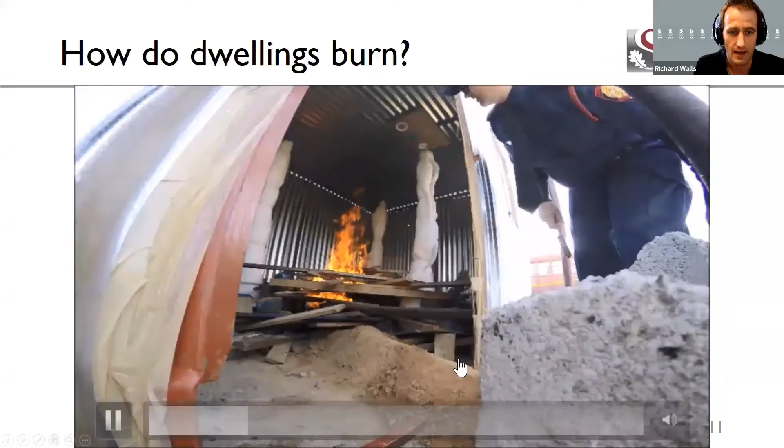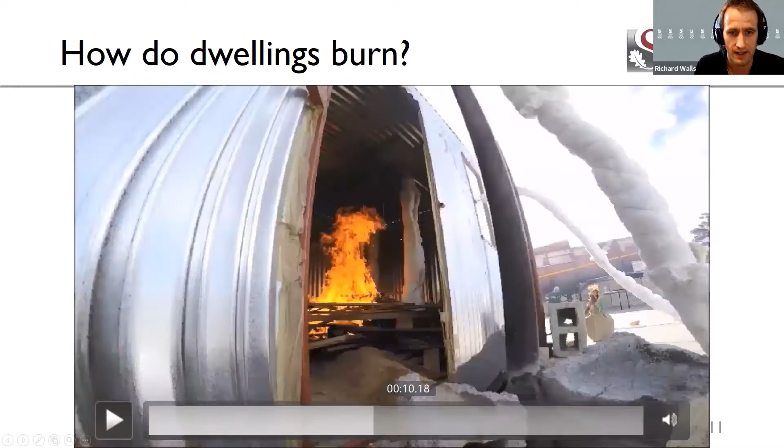So let's look at how dwellings burn. What's quite fun talking to firefighters is we started with conducting experiments just on single dwellings. What's useful, but maybe not unexpected, is that you see fairly typical fire dynamic behavior: there's ignition, a growth phase, a localized fire, a hot layer builds up at the roof, and then you head to flashover in the dwelling. From flashover, you get 1,000 degrees Celsius, flames emerging from the windows, and so on. We can describe this relatively well, and with computers and mathematics we can now predict the temperatures and fire behavior with reasonable certainty, if we know what's happening inside. Ignition is far more difficult.

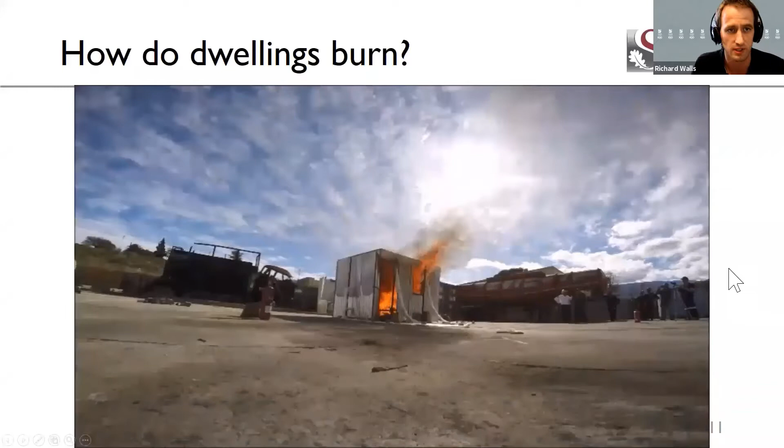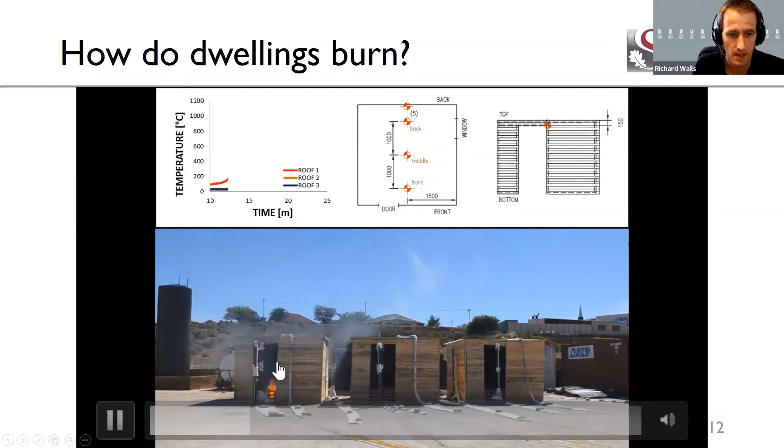So we started thinking about what happens when there are multiple dwellings with different types of cladding. Here are 3 timber dwellings, and at the top you'll see the temperature. In the first one, we ignited some timber cribs, and the temperature at the roof is now about 100 degrees Celsius, slowly starting to build up. Once there's enough hot gases, the cladding on the wall ignites, and we have flashover in the dwelling.

It then rapidly spreads through to the dwelling next door. We actually had a fire tornado, a little fire whirlwind developing, 2 to 3 meters in diameter. It spread to the second dwelling, the hot layer drops, the second dwelling ignites, and it spreads to the third which also ignites. Once it gets into the cladding and finds the combustible lining, that's always when things start going wrong. Even though it was timber, there was a bit of a delay, but once it got to the cladding, it was gone. We got temperatures between 1,000 and 1,200 degrees Celsius in this experiment - very intense, very rapid spread, very high heat release rates. Eventually it just burnt out completely, burning as fast as it could. At 16 meters away, items were starting to smoke from the incredible radiation.

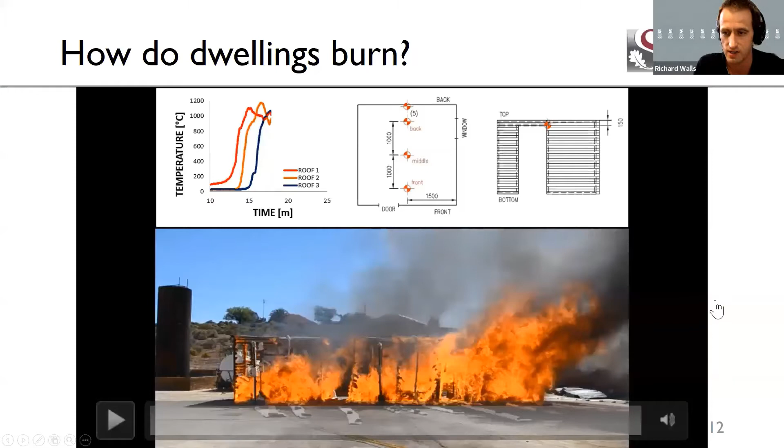It's much lower intensity when you have non-combustible cladding. If you have steel cladding or corrugated iron, it's a far less intense fire. We can start predicting that, predicting flashover and spread. This is actually a computational fluid dynamics model looking at spread from one dwelling to the next, predicting when each would ignite and how it would behave.

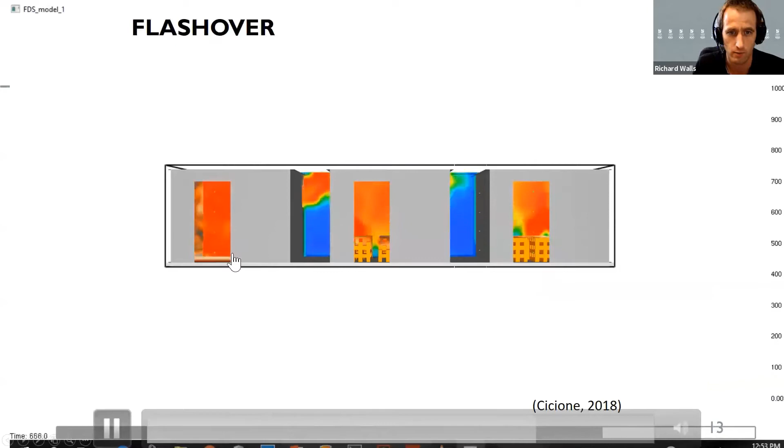On their own, these models are not particularly useful - it's like, well, great, you have a very accurate model of something that's highly uncertain. But at least what's useful is it can start helping us predict spread. I won't show it in this presentation, but models for predicting spread through an entire settlement are starting to be developed. So from there, we actually moved on to 20 dwellings.

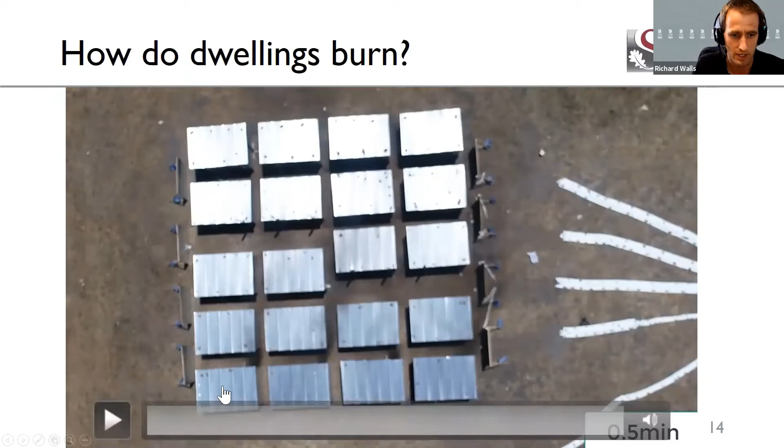This is a full-scale experiment with 20 dwellings, arranged 4 by 5. We ignite the 4 dwellings at the bottom, and about a minute after ignition, the first 4 have caught at the bottom of the screen, then it spreads onto the second line of dwellings at about 2 minutes, and from there spreads to the third line. By the end of the experiment, about 5 minutes, all 20 homes were on fire.

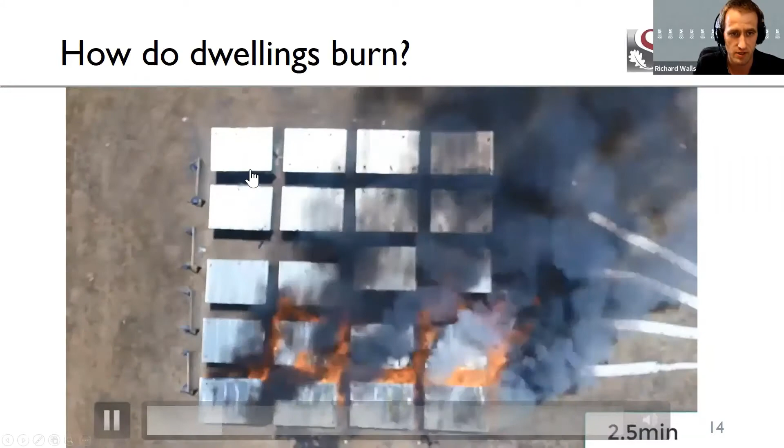There was a bit of wind blowing, about 20 to 25 kilometers an hour, but there are far stronger winds that blow in our area. The fire spread and came straight through, hitting that last line of dwellings. The normal response time is way in excess of this - so if a fire starts this way, by the time it's this far along, maybe the fire department is just on its way, if someone's dialed the right number.

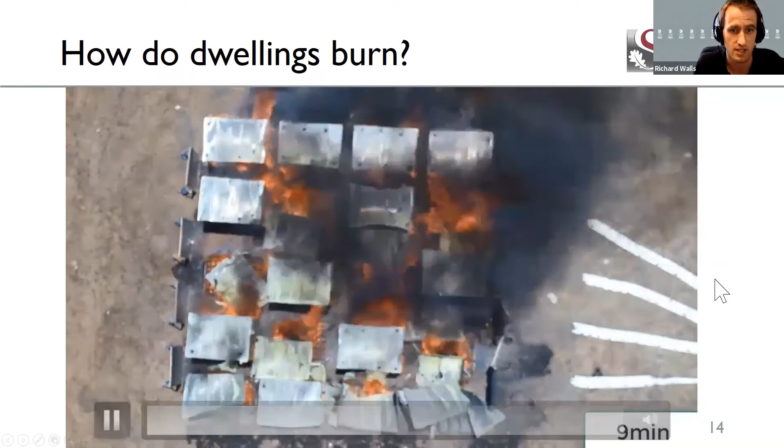It was just useful to show the intensity and to evaluate interventions against this, because many people in South Africa are proposing all sorts of suppression products, paints and boards, trying to sell them to government, municipalities or fire departments to solve the problem. They think it's magically going to take it away. But not a lot of testing has been done to evaluate informal settlement solutions against real life experiments.

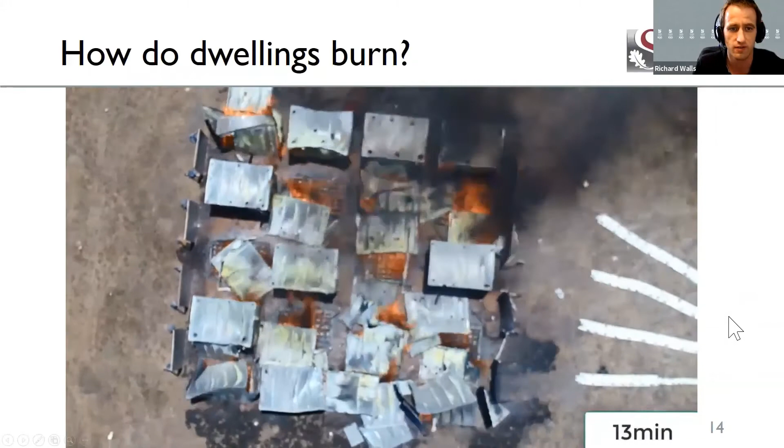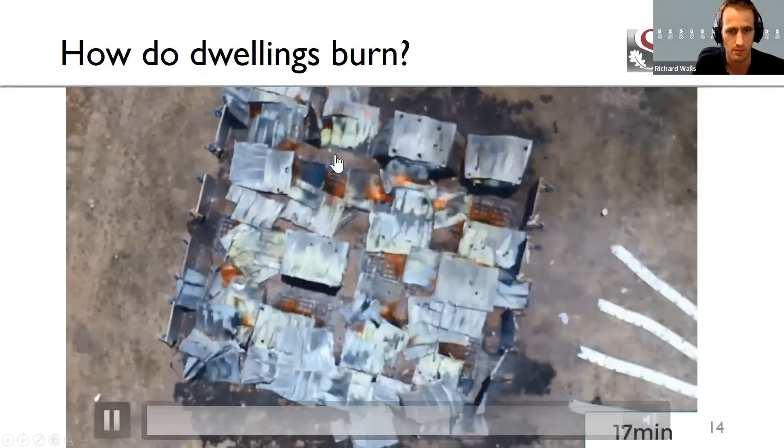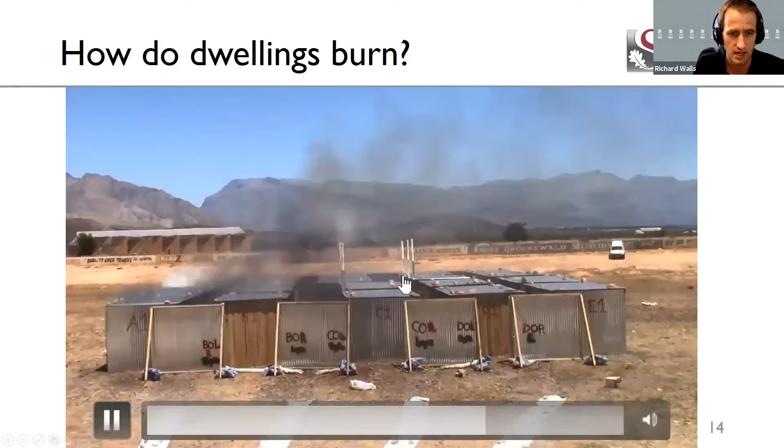So that's what we've been doing, to try quantify what we actually need to do to slow these things down or stop them. Coming back to the video, after about 17 minutes there was pretty much nothing left - the entire settlement was totally gutted. What was actually kind of funny is the last dwelling standing had 4 dwellings around it with timber on the side, and it burned so ferociously that it didn't allow oxygen into the one in the middle, so we actually oxygen starved that one. Here you can see a side view coming all the way through.

There's us watching - months and months of work, and 5 minutes later our experiment was long gone. This is actually on YouTube. I forgot to put the link up, but this is public knowledge, and it's in a journal publication that's in the public domain as well. So all this data is publicly available.

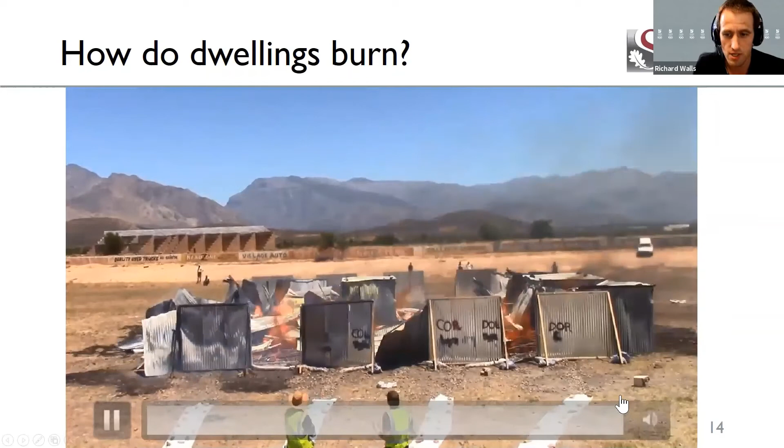You'll just see a front view pop up now where we then ignited the first lines of dwellings. What's important to see is the ignitions that occur, because many people will often try to protect the walls. But what you actually find is with the intensity, if there's any hole anywhere, the fire will slip through.

Coming along, just going to quickly run through another case study from which we're trying to start basing data on fire spread and behavior. This is the Imizamo Yethu fire in 2017: 2,197 structures destroyed, 4 fatalities, around 10,000 homeless, extensive damage to the local infrastructure, about 100 million rands worth of damage.

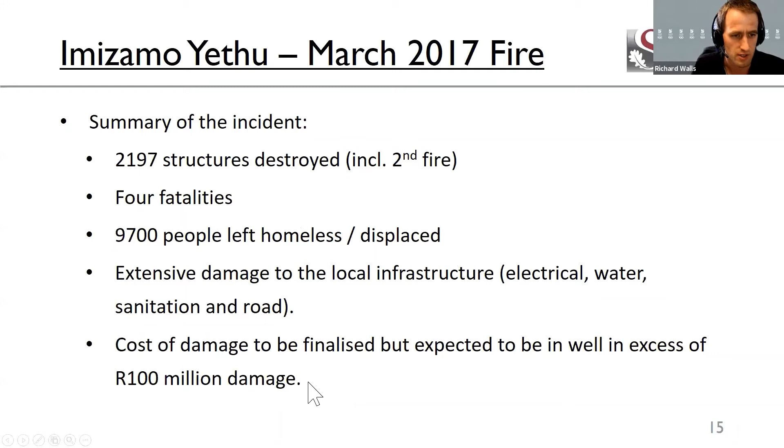It's about $8 million - I think it's less, our currency's gone down a lot, so $7 or $6 million worth of damage. It was a lot of damage caused to the area: 176 firefighters, 2 helicopters, 13.5 hours fighting, and 19 acres burnt.

This also is in a journal paper, so this is also publicly available knowledge. If in doubt, you can email me and we can send it through, or contact Nancy and we can pass these papers on to you. So the fire started there.

Because there was a lot of firefighting effort, it was slowed, speeded up, slowed, speeded up. But what happens is it hit a line of blue gums, and then everything just went pear-shaped after that. So the first sort of 7.5 or 8.5 hours, there was about 1 home a minute being lost. But then it hit a line of eucalyptus or blue gum and then blew down the hill.

Then you're about 9 homes a minute being lost after that, for a period of roughly 2 hours. Then it started slowing down as the firefighting operation started to take effect. They even had helicopters bombing homes, which is not normal. Eventually at about 1 o'clock they managed to stop the fire. So it was an incredibly intense fire and a lot of damage done.

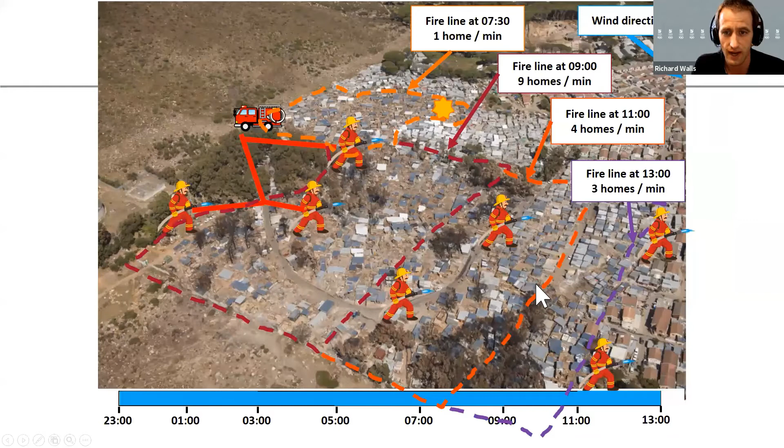So I'm just going to lastly swap to something - I'm going to use it very briefly just to show what happens in a real life incident. Oh sorry, this is now footage - unfortunately this I can't share with you, but I have got this in a private file.

So this is actually another analysis that is the paper we can share. There is a paper on this - I can't share the video, but I can share the paper. This is where about 40 homes got destroyed.

What's interesting to see is the initial community response, putting in firefighting efforts early on. But it also, as you probably have seen, is that there was actually a gas canister detonation in the middle of it. It hit probably an LPG canister.

It was about a little bit further on, and it ended up spreading rapidly. In this period of time, 41 homes got destroyed. And what's useful is we got data from start to finish: what did people do, how did they respond, where did they go, how did they intervene, how did they evacuate, et cetera. From that, it's useful to then evaluate strategies.

Again, there we go, you'll see a canister detonation. Shortly before that, there were people on roofs fighting the fire. After the detonation, you can see everyone basically runs away. But there was still a lot of people in the area.

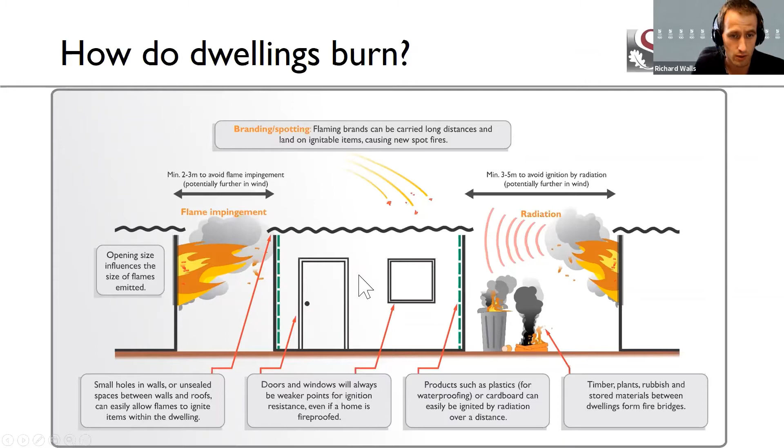People will also try to retrofit the homes and make them more fire resistant. But at the end of the day, the door and the window is always your weak spot. If you've got flame impingement against the window, it will crack, the curtains will ignite, and you've got a path into the home. So even just closing your doors and windows upon evacuation helps - time is of the essence.

One major problem we have in South Africa is people, firstly, don't understand how complex it is getting to these events, and secondly, who to phone. We have a bit of a problem in that often they phone the wrong number - they'll phone the police rather than the fire department. That hopefully will be addressed soon.

So the more we can cut down this timeline, the better. Anything that reduces the time required helps. But this is especially difficult when you need police escorts, and often we have live electrical connections that also need to be turned off.

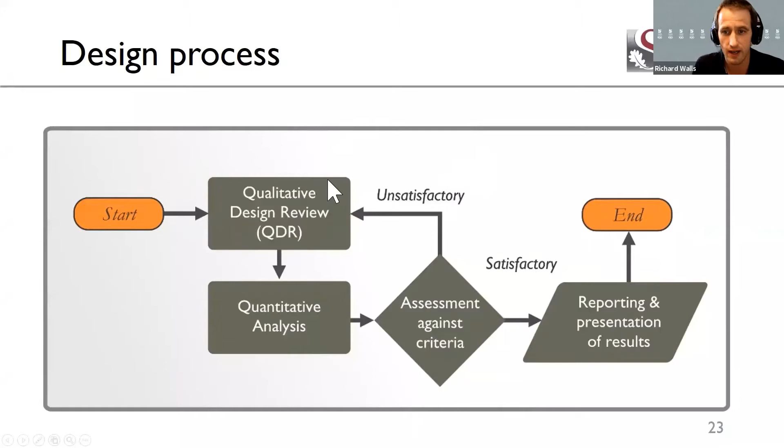So in this, flowcharts have been produced to help guide people through, especially municipalities and decision makers, to analyze the context, review the settlement layout, establish fire safety objectives, identify hazards, establish fire scenarios and acceptance criteria, then trial fire and social scenarios, and run through this. We don't have time to look at all those things, but there are ways and means of putting together a picture of what is my community, what do I need to do, what is success, what is failure, and then how do I compare it against that?

And also, where the experiments that I showed you earlier is trial fire and social scenarios. A lot of the solutions we see trialed in South Africa are less effective because they don't understand fire dynamics, ignition, spread, and all the intensities involved. I'll show you some of those.

Ultimately, we propose a bit of a framework in that there is no magic solution. Unfortunately, I spend a lot of time presenting to the Department of Human Settlements and various other groups, and you'll arrive there and they expect you to have this magic wand to give them a gadget that can take the problem away, and it doesn't exist. As I said, this is preaching to the converted here.

We need a range of things. You may have different names or classifications for these, that's fine, but it's just the concept. We need active fire protection: suppression, detection, etc. That's you guys doing a fantastic job. Passive fire protection: construction products, area layout, how do we reduce the speed of spread? And then how do we do fire prevention, reducing risk of ignition, which I know many of you are also involved in.

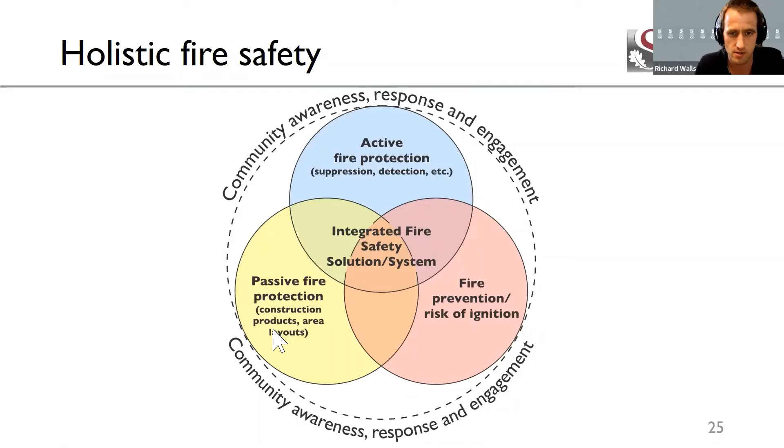I think the problem we see in South Africa is often a municipality will target one area. They will put money into buying more fire trucks, which is great, but if we're not doing fire prevention, that's a problem. Or they will buy some passive protection product to put on people's walls or try to improve home construction, but to be honest, those are often less effective, or there are just too many fires starting and not enough fire response.

So in the work, what we do is map out a lot of different interventions. These are just some of them: reblocking, boards, paints, improved construction materials, access, electrification, first aid, community response, water, fire department, buckets, extinguishers, and then just look at what's the pros and what's the cons.

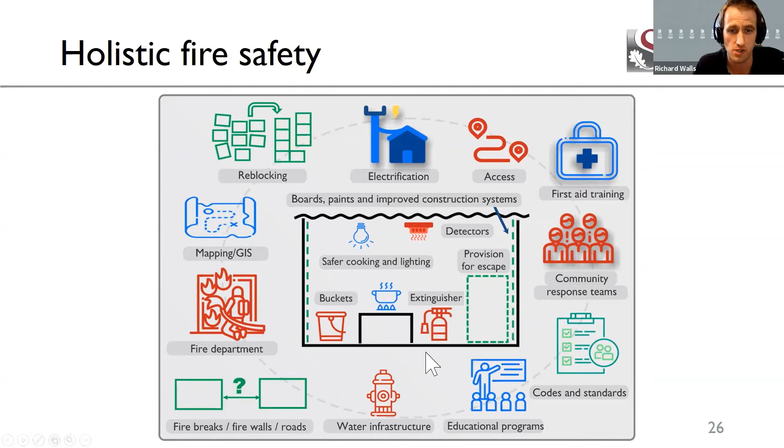As I said, no magic solutions, but just looking at, if I issue a fire extinguisher, great, one 9-kilogram DCP may do the job, you might need a second one, but does it need maintenance? Do you know where it is? What's the cost of it? All those sorts of things. So we just take it through. That's why the book's so long, because it takes you through a lot of interventions and evaluates them.

So here are some of the things we evaluate. For instance, fire departments, including strategies, training, mobile firefighting units, aerial support, improving relations, etc. Looking at a national unified emergency number, that's big for South Africa, it may be less of a deal where you are. Water hydrant infrastructure, suppression products, and then you get blankets, bucket brigades, dry firefighting.

Then we have smoke and fire alarms, community response teams, reblocking, firewalls, roads, construction materials, retrofitting of homes, escape mapping, electrification, fire safety, improved cooking, education, and medical training.

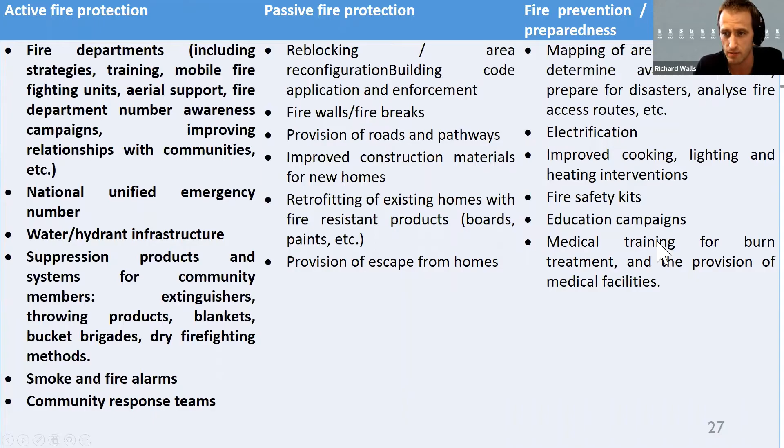So those are some of them. Just to summarize, let me briefly go through some of these items.

Firstly, our main problem is knowing the phone number, knowing the local fire department number. People regularly phone the police instead, and that's probably the biggest issue. If we could get that right, people would just phone the fire department. The problem is it's a 10-digit number, Cape Town 021 480 7700 - it's too long. Hopefully that'll be addressed soon. The City of Cape Town is doing a great job, and Winelands and various others, to promote it, but it's still difficult.

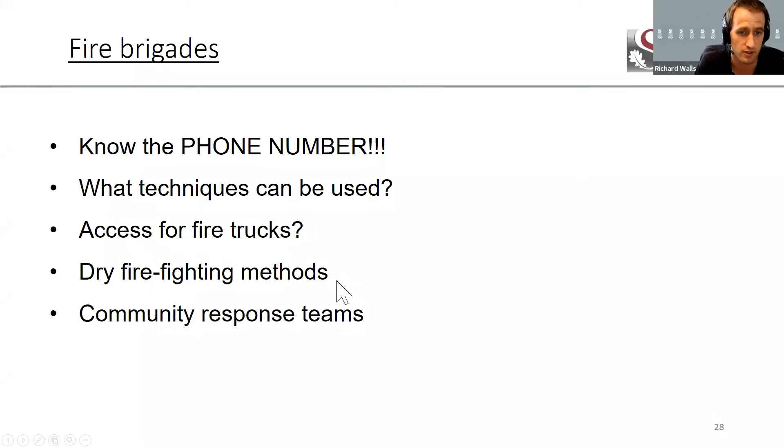What techniques can be used? Access for fire trucks - these are the sort of questions that can be asked. Can you use dry firefighting methods? We used to do that back in the day, but it's a bit dangerous now, driving trucks over things - you can squash people. So, community response teams.

I think many of you are aware of those, so I'll discuss some of the interventions currently being tried, and where they work and don't work.

A while back there was work on intumescent paints. Intumescent paint is a fire retardant paint you put on a home, and it basically expands and provides a char layer. It's commonly used in structural fire design for high-rise buildings, tunnels, and all sorts of places. As a product it's often quite efficient, but for informal settlements it just doesn't work, because this is meant to protect structural elements, not to prevent ignition.

If you put this on, it doesn't necessarily mean you're going to have reduced ignition, because the impinging flames will still fire the home. Even if the paint activates, chances are it's not going to do much. Same thing with boardings - people put on boards and they don't fire stop it.

Fire safety kits are often issued after disasters. So when homes are burnt down, they will issue sheeting and timber, etc. With recent budget cuts, that stopped happening. This at least helped with relief efforts and helped put people back on their feet, but it didn't reduce the fire risk - the fire risk remained identical.

Various educational programs, which I'm not going to have time to go into, but also looking at municipal infrastructure, and how this influences and doesn't influence things.

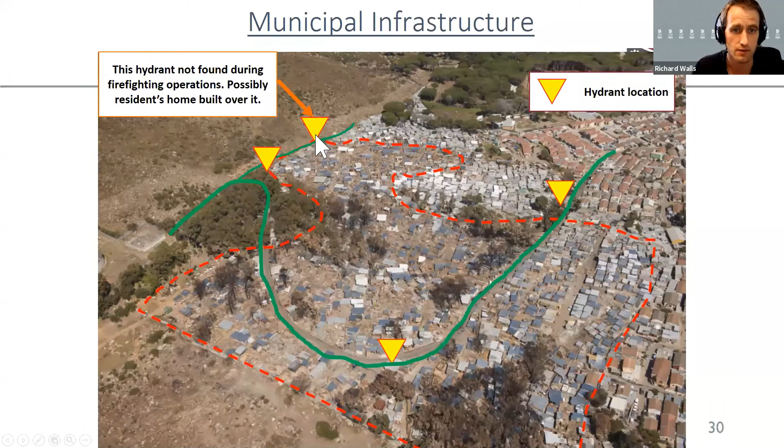For instance, this was the Imizamo Yethu disaster. These were hydrant positions, but one of these hydrants was not found during firefighter operations - possibly the resident's home was built over it, so they may have been using it for domestic water supply. Then this hydrant here was used extensively; they had three lines going off of it, but it had insufficient pressure for the multiple lines, so they had to keep swapping between the three different lines. You didn't have three teams operating, only one at a time, because of water restrictions in the area.

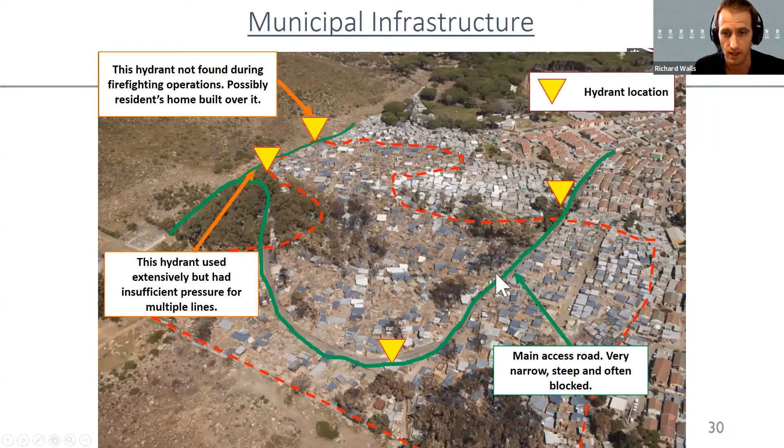The main access road was very congested, and often these infrastructure problems - which I understand many of you may not have the authority to deal with - make a big difference. The road was narrow, with limited access, and people build into the roadway, so it's just a general mess trying to get people in and out of this area during a disaster. So lobbying for decent infrastructure and road access makes a big difference.

Electrification - now electrification does help. We are seeing numbers that show when suburbs are electrified, it is assisting, but I think sometimes people think it's a magic quick fix, that once homes are electrified all the problem goes away. You see everywhere in the world, including America, electrified homes and you still have homes burning down. One of the problems we have is illegal connections.

People will tie into existing infrastructure - you can see all these lower lines are electrical connections, and this becomes a mess. Fire departments can get electrocuted by it, or when the fire truck arrives they actually just can't get their truck underneath, so they have to either break the lines, which is risky, or do various things. It's a major problem - they often just can't get in because of these electrification lines.

I do support electrification in general. It is good, and it helps reduce risk and improves quality of life. But I think often decision makers aren't aware of the problems, and we are seeing quite a lot of electrical overloading. A line comes into people, and we often have electrical problems leading to other issues.

Cooking, lighting, heating - the main question is, what could we do to improve the way people use energy for daily living? There are various things: safer cooking stoves, solar lights, all sorts of different interventions that people are doing for cooking, lighting, and heating. All of them have their place, and I would encourage all of them normally.

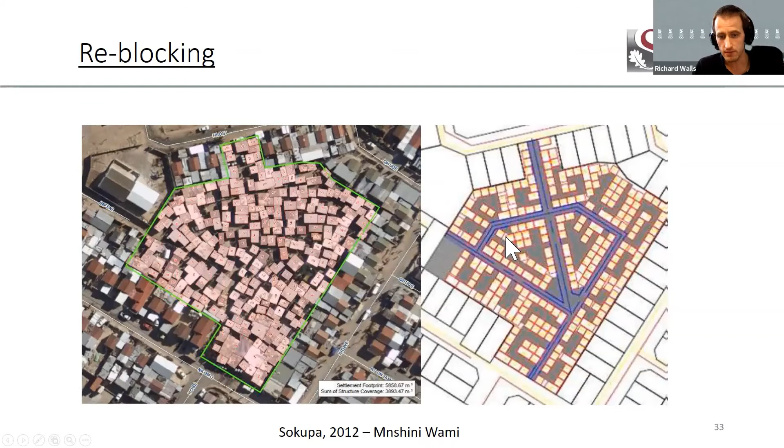There has been a certain amount of success with reblocking in South Africa. For instance, you have a settlement, here's an informal area, and the people work with an NGO or municipality, and they reorder themselves into a blocked arrangement. This is good for providing access, layouts, a bit more flow, etc. It's quite time consuming, quite resource consuming, and it needs a lot of community buy-in. This does not happen overnight - it requires the roads people, the infrastructure people, and all sorts of people sitting around the table agreeing, plus community investment. A lot of people are pushing this, and I'm not against it, but I think people don't realize how much work it is. This is becoming more of a policy in South Africa, but it's not easy, and it is slow.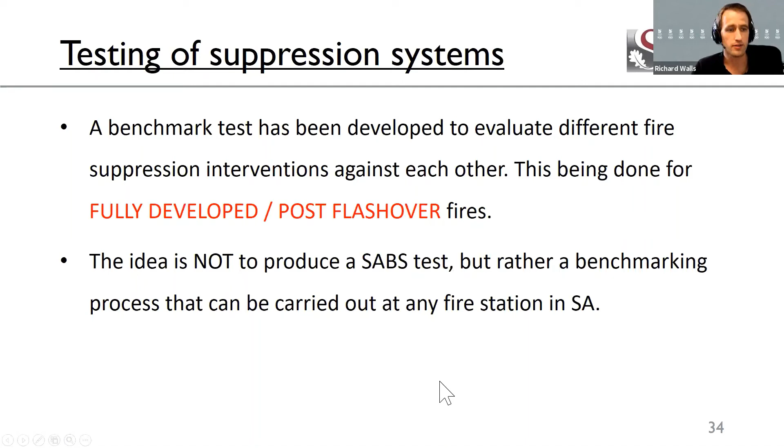Fire suppression systems may also be interesting, at least in terms of evaluating things. We developed a benchmark test to evaluate different fire suppression interventions against each other, done for fully developed post-flashover fires. The idea is not to produce an SABS, NFPA, BS, or whatever code of standard you have, but rather a benchmarking process carried out at a fire station in South Africa or abroad.

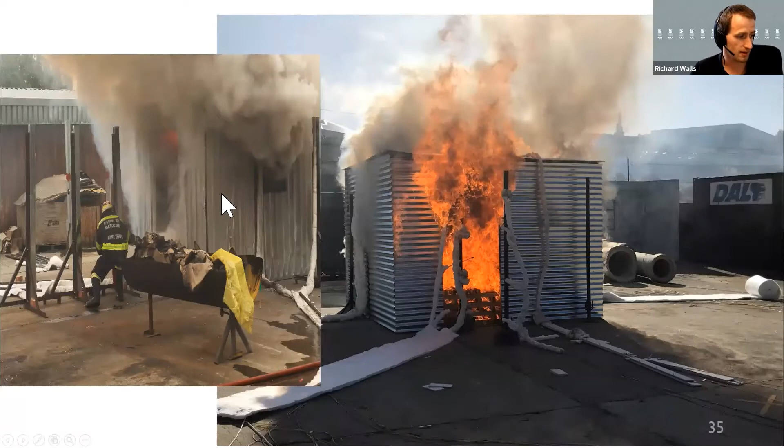So we basically just built a dwelling with a certain fuel load and then burnt it down. As I said, I like arson - I burn things down. And then we asked, how can we put it out? We put it out in various different ways.

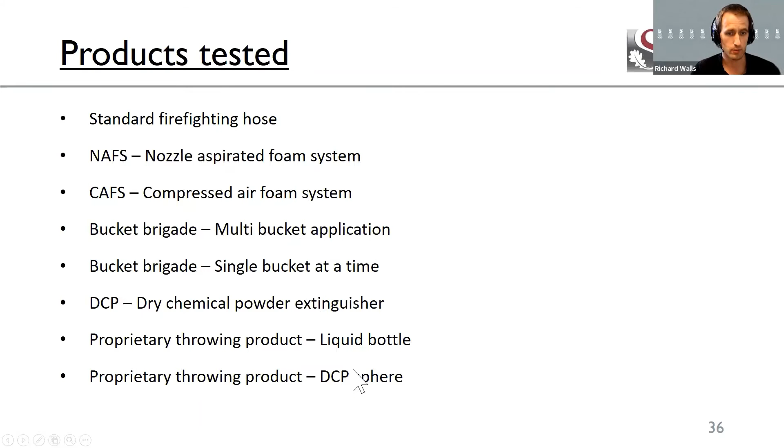Standard firefighting hose, nozzle aspirated foam system, compressed air foam system - those top three are the fire department stuff. Then we used bucket brigade, multi-bucket - so a bunch of buckets all at once, or a single bucket one at a time. We also used dry chemical powder, proprietary throwing products, a liquid bottle, and a dry chemical powder sphere.

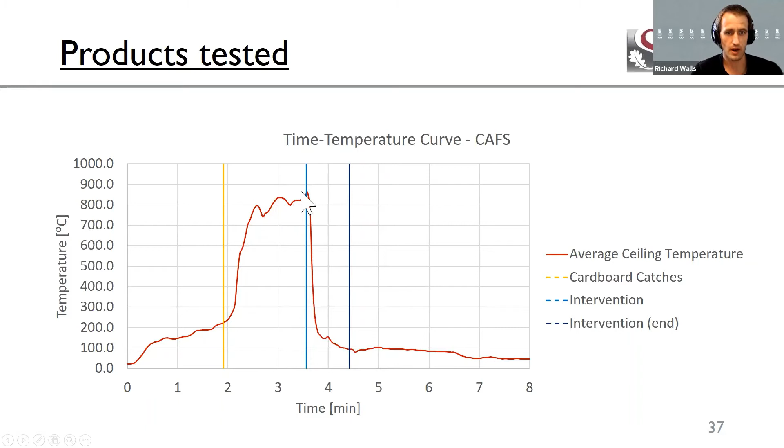We measured the temperature and looked at, from the time we apply our intervention, how long does it take to drop the temperature to basically extinguishment level. This is a ceiling temperature, so even when the fire is extinguished, you can have hot gases and steam at the roof. We follow this curve, measuring temperature along the way, to see if what we're doing is influencing the results - mainly from post-flashover to extinguishment.

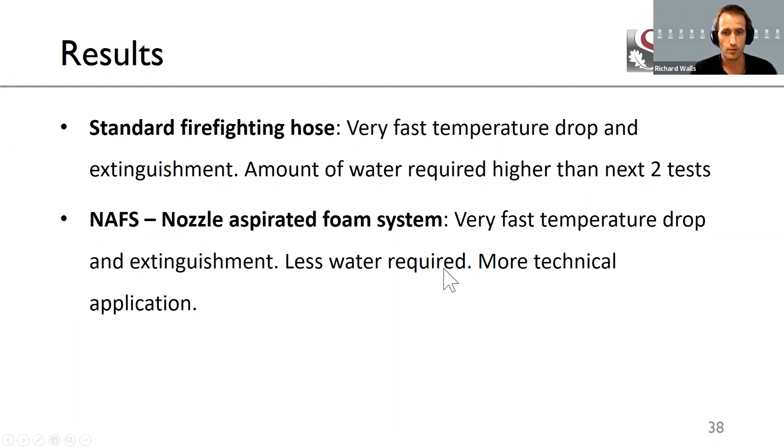The standard firefighting hose showed a very fast temperature drop and extinguishment, but required more water than the next two tests. The nozzle aspirated foam system had a fast temperature drop with less water required, though it needed a bit more technical application and setup for the foam addition. The compressed air foam system, which is becoming more common in South Africa, showed a very fast temperature drop and extinguishment with much less water required - though it has an expensive initial outlay and needs a more experienced operator.

You can get smaller units, maybe effective on bakkies. The Americans would probably call this a truck or utility vehicle. There are various names for a sort of smaller vehicle that at least can get in there.

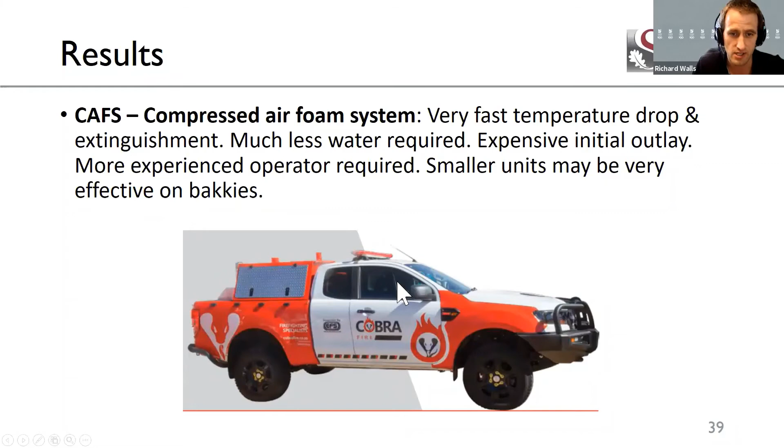With compressed air foam systems, you get quite a high expansion, so it can blanket a lot more and get there and do more. But you need quite a bit more money outlay, and it only holds a couple hundred liters of water - though with expansion you get much more effect. So they can get in and out, but it's still a balance: is this going to be better than a truck? It depends, so there's a bit of a debate.

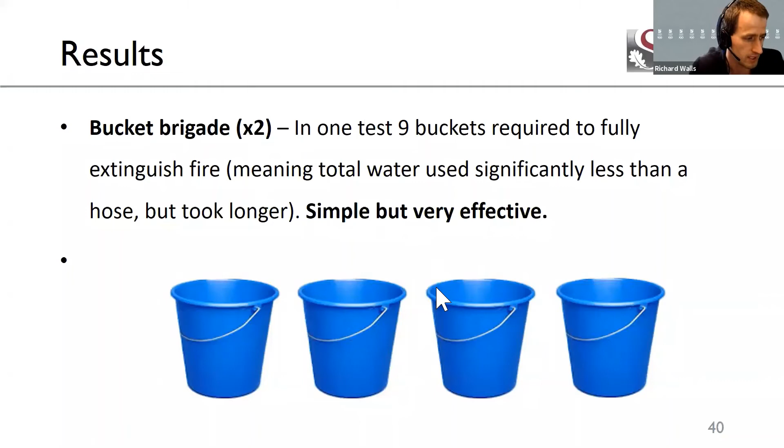Bucket brigades, good old buckets. I like buckets. In one test, 9 buckets were required to fully extinguish the fire, meaning total water used was significantly less than a hose, but it took longer. It's simple and effective. A couple of 8, 10, or 12 liter buckets is, to be perfectly honest, often the best way. We tried it in 2 different ways, not a huge difference in results, but just get the wet on the red as fast as possible. It requires a lot less water than a hose, but obviously the hose makes sure everything is dead - it kills it and there's no reignition, whereas reignition is much more likely with buckets.

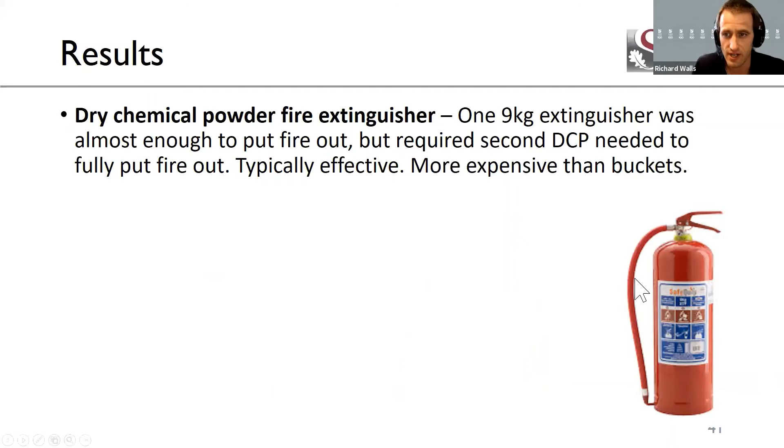Dry chemical powder fire extinguisher: a 9 kilogram extinguisher was almost enough to put the fire out, but required a second DCP. Typically effective, but more expensive than buckets. One of the problems we see is people issue these and don't realize that A, they can get stolen, B, I believe they even get used for drugs somehow - I'm not quite sure - and then they require ongoing maintenance, etc. So often this rollout is done without thinking about all those sorts of issues.

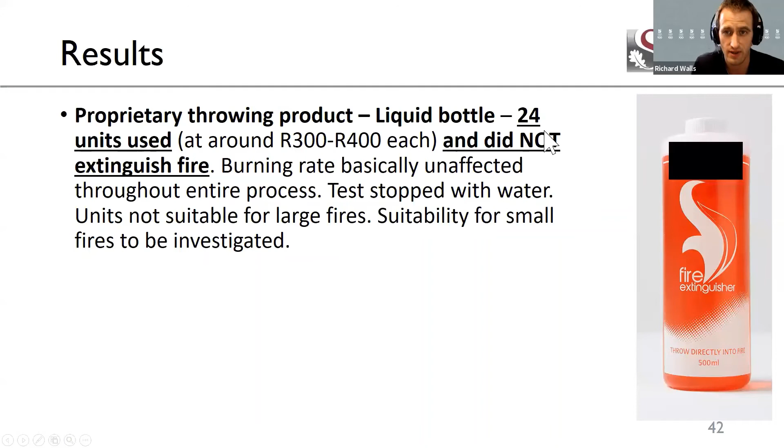Then we tried the magic sort of product - something being sold to municipalities to extinguish fire by throwing it directly into the fire. It's about half a liter, and we used 24 of these units. It did not extinguish the fire. What happens with these smaller units is when you throw them into the fire, it may suppress it locally in a half meter area in the corner, but the temperature in the dwelling is above spontaneous ignition temperature, so the fire comes straight back. The water evaporates and whatever product is in it does very little - you can't apply cooling agent fast enough. I literally threw 24 of these and was quite proud - I didn't miss once. Normally when you're panicking you may miss. These were about 300 or 400 Rand each, so about 10,000 Rand total, which is about $600-700 worth of product, and it didn't slow it down.

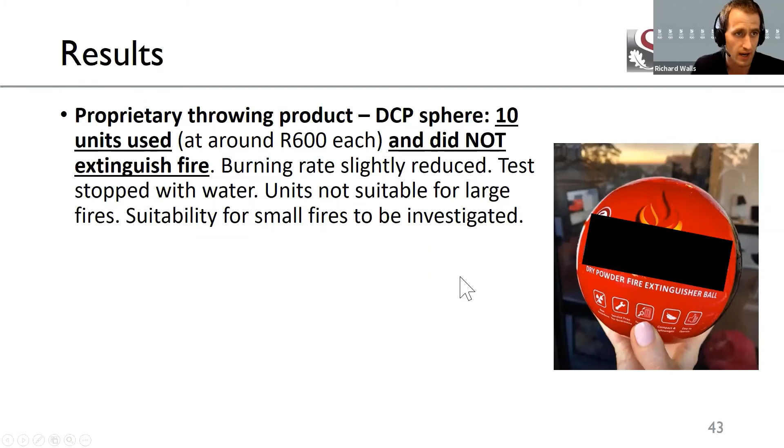We also tried a dry chemical powder extinguisher ball - a ball with DCP inside with a fuse that you throw into the fire. We threw 10 of those at about 600 Rand each, so about 6,000 Rand, around $400. It did not extinguish the fire. Burning rate was slightly reduced, and the test was stopped with water. These units are not sufficient for large fires - easy to miss, may not go off, so we're cautious of using those. They may be suitable for small fires if thrown accurately, but on larger fires typically not suitable.

Summary of suppression: standard firefighting equipment is effective. CAFS can potentially use less water but has an upfront cost barrier. Buckets are surprisingly effective - good old buckets. DCP is effective but must be maintained, and be easily available. Proprietary products are not suitable for post-flashover fires. The problem is often the mayor sees a great intervention and buys a whole bunch of these proprietary products, and then they're just not as effective as people were hoping, and they end up sitting in the cupboard when people need them.

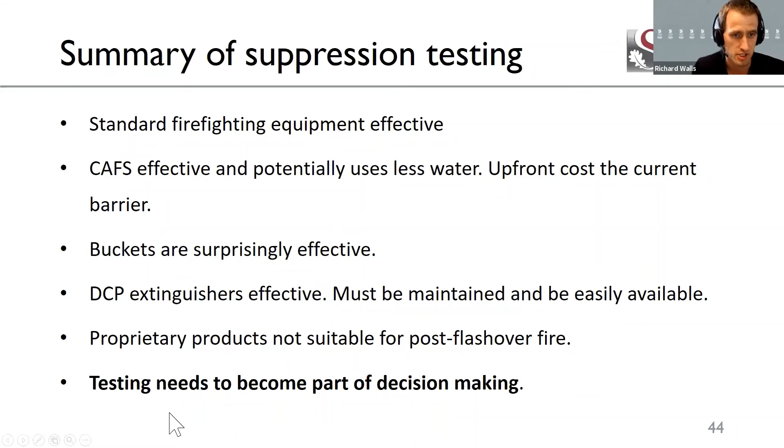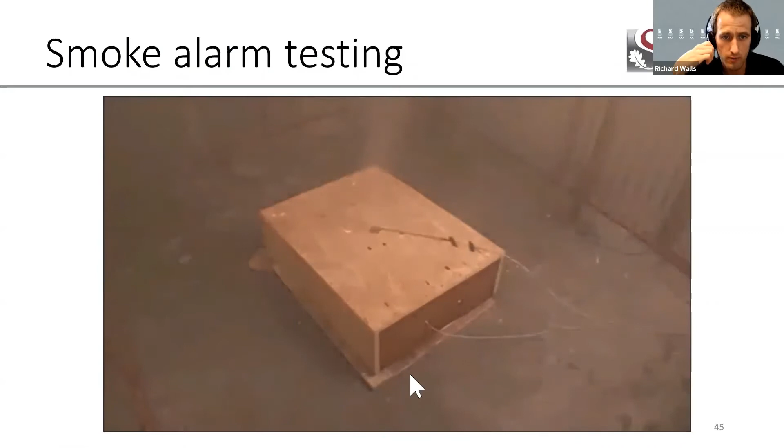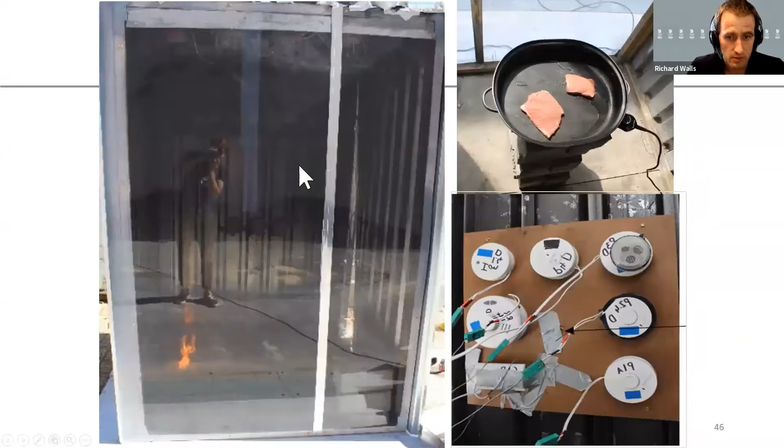So we advocate that testing must become part of decision making. Further along than that, there's smoke alarm testing, and we've been involved with a rollout of somewhere between 5,000 to 10,000 smoke alarms. We did the upfront initial testing, but then our provincial disaster management has been leading the main charge on this. We built some dwellings and started testing activation in an informal dwelling to see if this would work.

Because there are various devices that people are providing, either photoelectric smoke alarms or rate of rise fire alarms, we did nuisance alarm tests and various other tests. We're hoping to win a grant soon so we can do quite extensive testing on this. This was really preliminary work, good results, but still preliminary, as it was only about 10 small tests. You need to do like 50 or 100 tests to really be useful.

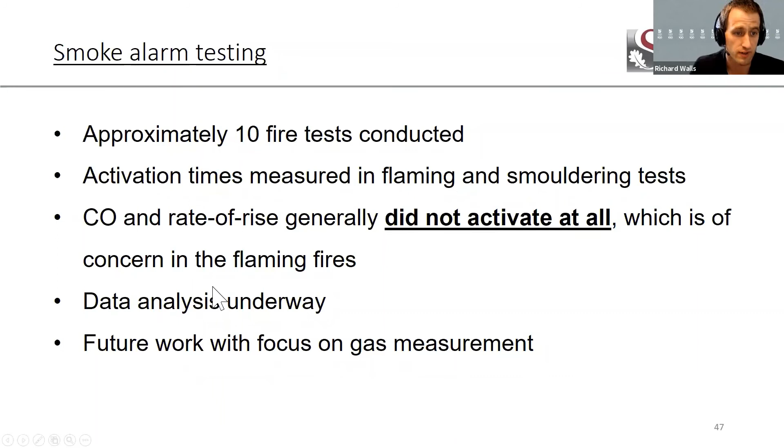Activation times were measured in flaming and smoldering tests. For instance, the carbon monoxide and rate of rise alarms generally did not activate at all. They require quite a significant signature before they go off, which is a concern for flaming fires. Data analysis needs to progress, and we'll focus it further.

But just to comment on those, what we do see is that the rate of rise devices do not go off at all in smoldering fires, as is common knowledge. The smoke alarms, however, the photoelectrics, are much better at detecting smoke, and so they will detect a smoldering fire.

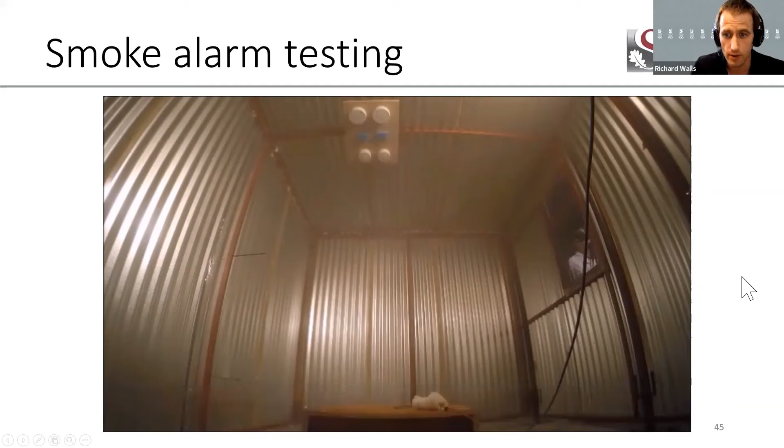The biggest challenge was we're seeing quite extensive nuisance alarms for them. The environments are quite noisy, dusty, bugs get into them, etc. So they experience a lot of nuisance alarms, which is a problem. They've had a couple of large rollouts, and nuisance alarms have been problematic. We're hoping to find a simple way of modifying it. We actually have some ideas how to do it, but we will wait to see whether we can do that or not.

So, last couple of things: backyard dwellings. I don't know in your countries whether you get these or not, but you have a formal home and then backyarders, so you will build one, two, three. They sometimes call it shack farming. There are a couple of things we're seeing with these. Backyard dwellings are often highly flammable with high fuel loads.

Informal electrical connections to the main house are high risk, and we're seeing more electrical fires starting. Adjacent formal homes have higher fire risk due to the presence of the backyard dwellings. Fencing, formal houses, and other backyard structures make evacuation difficult.

What you see is a higher death rate per incident in backyard dwellings than in informal settlements. In informal settlements, people can evacuate. In backyard dwellings, people are trapped by the formal home, the walls, just the structure around. So if I'm here, I've got to get through that home, out the next one. Maybe the door's locked, maybe the windows are blocked. So there are a lot more fatalities per incident, even though the fires aren't as big. You don't normally have 500 homes, 100 homes, 20 homes being affected, but when they do occur, we're getting more deaths, and that's a major problem.

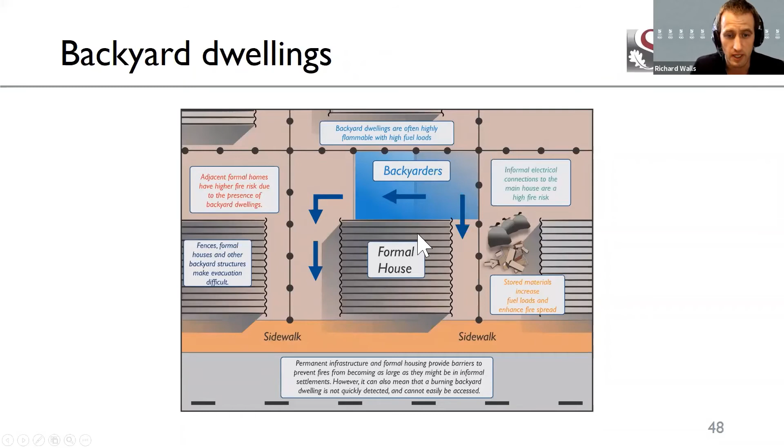Another trend is double story buildings. Double story is becoming more common here, and we've run some experiments looking at double story. What we're seeing is there's a lot more radiation coming from these, so more rapid fire spread and much more difficult suppression, because you struggle to actually get the water through the first floor to kill the fire. Collapse becomes a major issue.

This is a major concern for us long term, because it's pushing up population densities, leading to reduced probability of evacuation, much more difficult firefighting operations, much higher risk for firefighters, and generally a major headache. So this will become a problem in coming years.

So with that, I'm just going to sum up, because you may have felt like you were proverbially drinking from the fire hose, a lot of data, and probably a lot of negative, but also I think there is a lot of positive as well. I've focused on the challenges, but often the basic engagements we're seeing with the community, when the community is on board and the basics are known, it's just phoning the right people, having buckets of water available, making sure there's water supply, and stopping ignitions from the easily combustible items around the homes. Those sorts of basics, I think people are doing an excellent job with. I'm sure your organization is promoting many of these things, and often those are having a bigger impact than the fancy things people are trying to do.